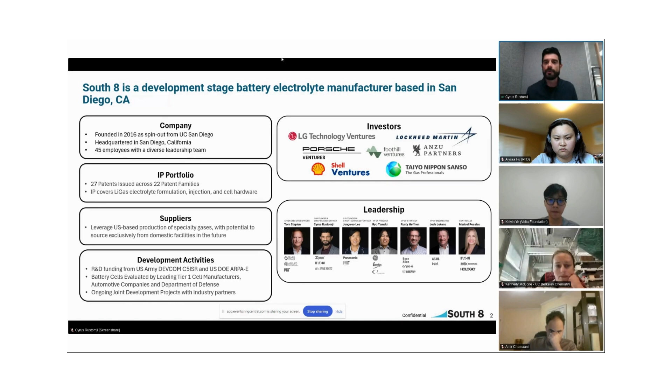Thank you. We are leveraging a wide base of suppliers, specialty gas manufacturers, with potential to source exclusively from domestic facilities in the future. So pretty much our entire supply chain is based here in the US and in North America, which is going to be extremely important as we move forward with lowering our reliance on our Asian friends across the pond there.

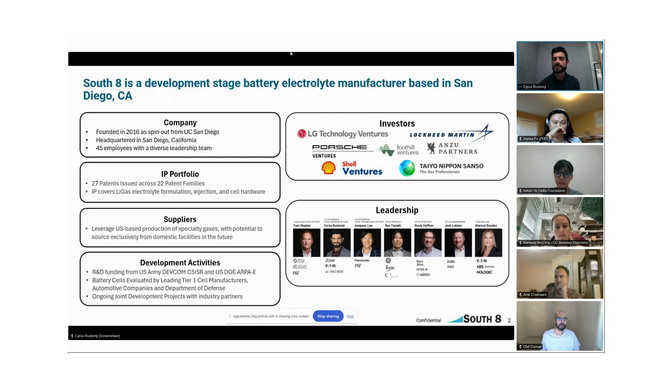And for development, we are actively working on a lot of contracts with the DoD, automotive manufacturers, power tools, et cetera. And what's public in terms of our investors, we have LG Technology Ventures on the cap table, Lockheed Martin, Porsche Ventures, as well as several other great names that are all shown here. And I really appreciate all their kind support over the years.

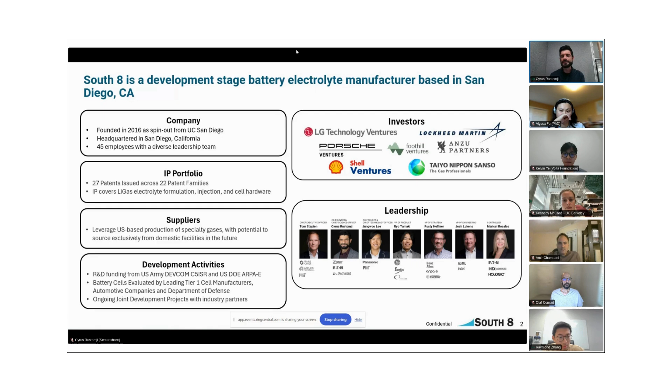So let's get into it. At a high level, the U.S. is behind in cell and electrolyte manufacturing today. The U.S. only has, I think, 60 gigawatt hours, where China is really kicking our butt there, producing closer to a terawatt hour, I believe, these days, in terms of cell manufacturing capability.

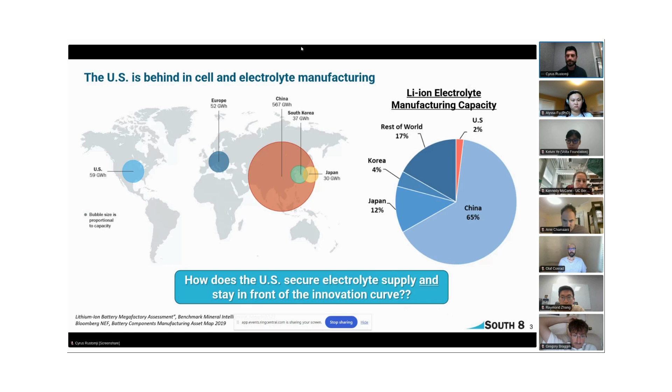The Biden infrastructure law has provided a lot of resources to scaling up manufacturing, but a lot of this is me-too products, basically the electrolyte that's already being produced today in Asia, specifically China. Same thing with cathode, anode, separators. So we really want to innovate on that and stay ahead of this innovation curve.

One area that we can really look at is the established gas industry, to leverage their already existing manufacturing operations to enable our rapid innovation and scale. If you look at the gas market, it's about $130 billion today, compared to the lithium-ion cell market, roughly 50, or I've seen reports up to $100 billion today on the cell level. The electrolyte is a very small component of that.

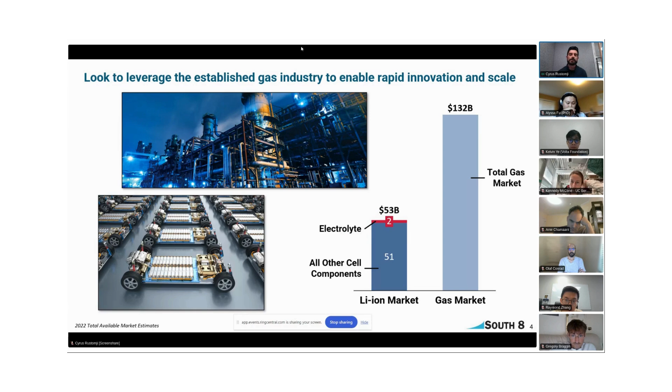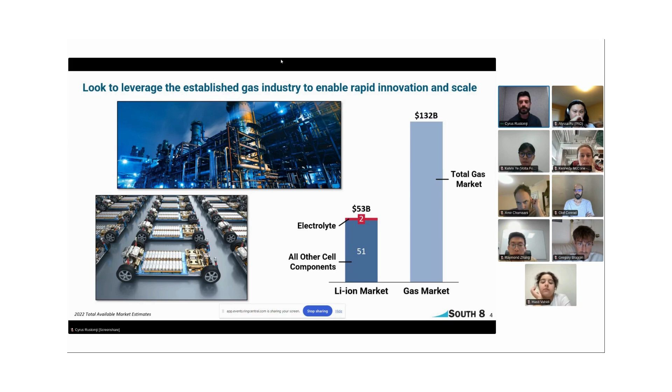And if there's a method where we could leverage this very large market into the electrolyte industry, that already gives us economies of scale to bring the cost very low. And I'll explain to you today how we can maintain and improve upon performance within your lithium-ion cells for these growing markets.

So what is South 8 really focused on? We are working on a novel liquefied gas electrolyte that is more or less a drop-in replacement for your current cells today. Of course, today we are all using liquid-based electrolytes in everything from our cell phones to our EVs and energy storage systems. It's basically a fluid that we sprinkle a little salt in, and it becomes an ionically conducting medium.

Now, I say fluid specifically because a liquid and a vapor are both actually fluids. We all know that vapors can also be liquefied under a moderate amount of pressure into a liquid phase. And so what we've been doing here at South 8 is taking these products that are gaseous at room temperature and standard pressure, liquefying them under a little bit of pressure, and then putting them into a cell.

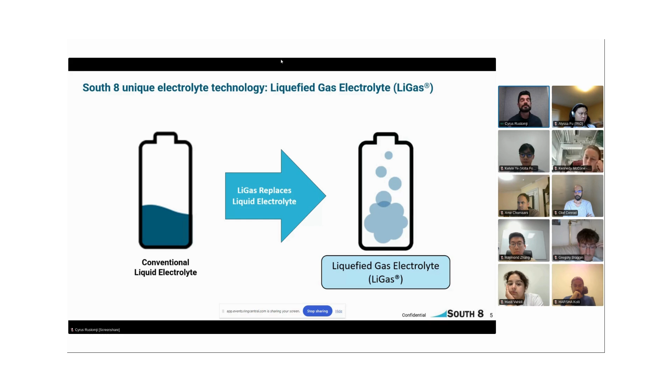Think of propane for your barbecue grill. Propane is a gas at room temperature and standard pressure, but you can liquefy it under a moderate amount of pressure and store it inside a tank underneath the grill. That's essentially what we're doing here. We have found a unique class of gases that work very well inside your lithium-ion battery.

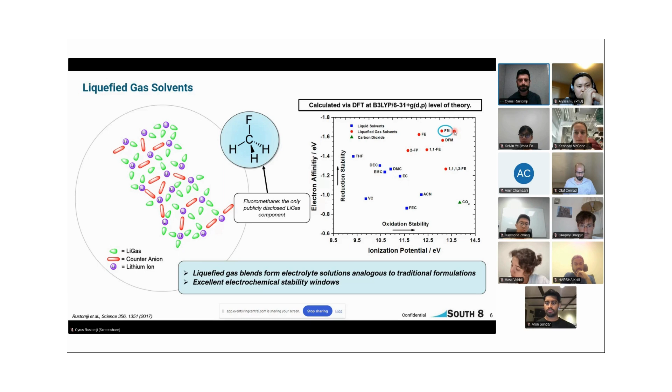So having established that these gases are electrochemically stable, what are some other qualifications that we look at for selecting our gases? Well, we want things that are cost effective. So we really just look at commodity gases. So think standard gases that you could buy off the shelf today. Pick up the phone, call up Air Liquide or Praxair or whoever, and have a cylinder delivered to your door the next day. That's essentially the components that we're looking at.

We always want to look at low viscosity and low melting points. That ensures good low temperature performance. We work with exclusively non-ozone depleting, non-toxic, and non-corrosive components. So anything acidic or that can be corrosive or toxic, we do not use. We do use some low global warming potential components, but these are significantly lower than your standard refrigerants. And so we are aiming to be very compliant with all the new regulations that are coming out.

Of course, I already discussed electrochemical stability. We want these solvents to be very stable in your battery cell device to ensure long cycle life. And I already mentioned these are commercially available in high purity, and of course compatible with all your common battery materials. So we use all your standard anodes, cathodes, separators, binders, current collectors; our gases are fully compatible with all these items. So it's essentially a drop-in replacement for that jelly roll.

Here on the right is a standard vapor pressure curve for a typical electrolyte that we use today. At room temperature, we're operating right around 300 psi. And around 100 degrees Celsius, we are looking to vent the cell. That allows us to operate with a good buffer between 60 degrees Celsius, which is the max operating or storage temperature, and thermal runaway, closer to 110, 120 degrees Celsius, which is generally where you see things really take off. So by venting the cell at 100, we can cut off that thermal runaway reaction, but still maintain very high performance in the cell applications and with our customer requirements.

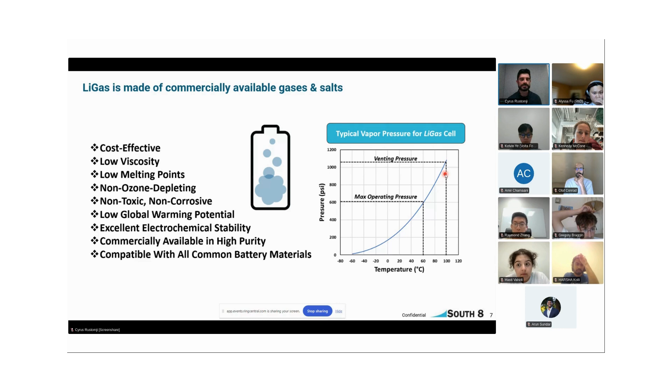So this slide is showing pretty much all the different value propositions that we have here at South 8 with our liquefied gas electrolytes. I'll touch on all of these through the following slides, but we do offer improved safety through a reduced fire risk, minimizing the potential for thermal propagation in your battery packs. Wide temperature range, industry-leading performance, everything from -60 to +60 degrees. I've already mentioned material compatibility is no problem for us.

We do offer increased energy. We are compatible with silicon anodes, but we can also go to thicker electrodes and higher voltage cells as well to increase your cell energy. We also perform very well under fast charge requirements. And lastly, it's a very cost-effective solution. Again, we're using commodity components, so we don't have to worry about manufacturing or synthesizing any new materials. So these are all very low-cost materials that we're using today.

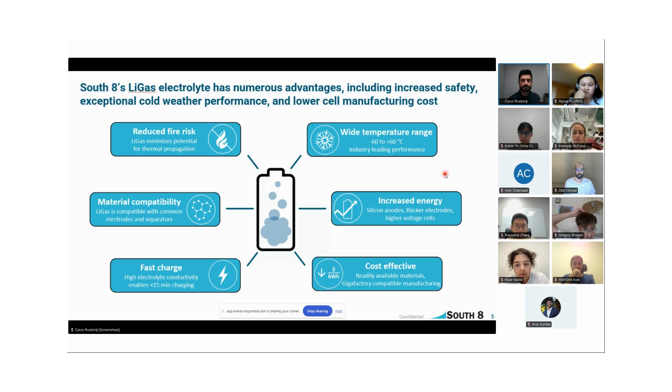So the gas electrolyte is a platform solution, and we are fully compatible with all your conventional cathodes, anodes, and separator materials. I mentioned that a few times already. One thing I will note is the form factors which we're operating in today. We're essentially just focused on cylindricals.

18650s and 2170s we are already producing and sending out to customers today. The 46XX packages is something that we're developing, and we hope to be shipping out in the very near future. Call it early next year. Those will start going out the door as well with some of our partners.

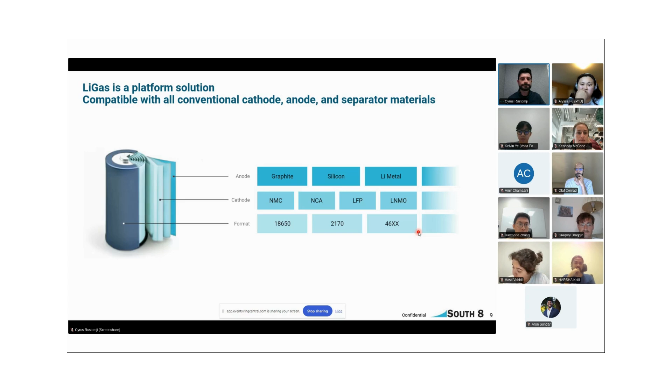Okay, let's get into some data. This is where all the excitement really happens, I'm sure, for a lot of you on the call today. So we want to share some data on this 2.7 amp hour 18650 graphite anode NMC811. So your run-of-the-mill type lithium ion cell today.

Over here on the left, we're showing a power map at room temperature. We charge these cells at a C/3 charge rate and then discharge at various rates from C/10 to 3C. And you can see our liquefied gas electrolyte can handle these increased rates without any problem, still achieving close to 100% discharge capacity at those higher rates. You can always expect a little bit of voltage drop there with the electrical impedance and things like this.

On the temperature map, we are charging these cells at C/3 at room temperature, but then discharging across all these temperatures. So everything from 40 degrees Celsius down to minus 60 degrees Celsius, we're operating very well in. Now, as we all know, lithium ion cells with your liquid electrolyte begin to lose performance right around 0 degrees Celsius. By minus 20, you're really losing everything if it's not already frozen. But anything below minus 20, you pretty much lose all your power and capacity in that cell, unless you have some specialty electrolytes, which some people have developed.

Here at South 8, low temperature is never a problem for us. We go down to minus 60, still delivering about 70% of your capacity on this specific cell design. We've also developed some silicon chemistries, which deliver even further improved performance down to minus 60. Now, while most people only need minus 20 or minus 40 degrees Celsius, we offer improved performance at those temperatures. But for those really extreme applications down to minus 60, we're really the only game in town. For those, we're really talking aerospace, NASA type applications, and defense, and some other opportunities out there as well, which we're looking into.

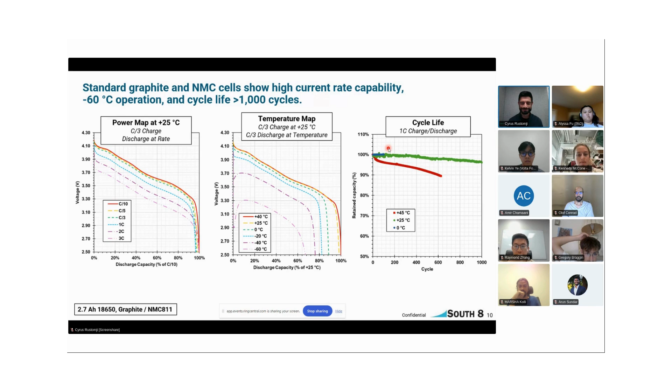This is the same cell package, but now it's third-party data that we are sharing with you today. So we have 2 jelly rolls, both 18650s, one filled with a liquid electrolyte, one filled with your gas electrolyte. And the liquid electrolyte is just your run-of-the-mill type carbonate-based electrolyte, nothing special there. This is just showing fast charge cycle life, where this is a DOE protocol, I should add. Every 3 cycles, it's a C/3 charge and discharge. Every 4th cycle, it's actually a 3.2C, which is equivalent to an 80% state of charge swing in 15 minutes.

And you can actually see that the gas cell is outperforming the liquid cell. We believe this is primarily due to the improved conductivity and the lower SEI impedance we have on the anode. So that allows less lithium plating on that anode and faster diffusion into the anode during these fast charge protocols. So we all know during fast charge, it's really the lithium plating that will kill you and kill your cycle life. So we actually mitigate that with the lower impedance SEI layer on that cell.

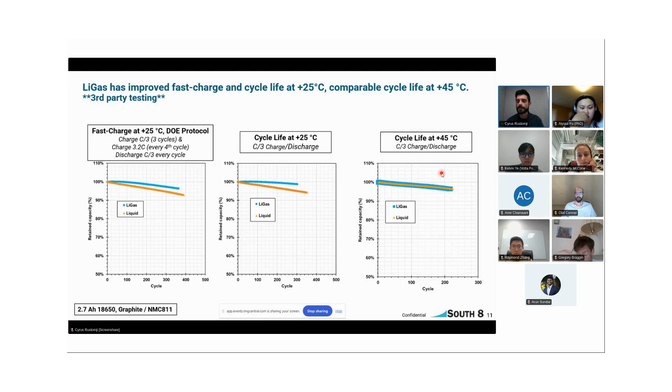Here's just your typical cycle life at C/3 charge and discharge, outperforming that liquid electrolyte. If you buy a commercially off-the-shelf cell from Samsung or Panasonic, this liquid electrolyte curve would be better, but this is actually just an R&D cell we procured from some partners at a low volume. So that's probably the reason why your cycle life on the liquid cell is not as great. And then at 45 degrees Celsius, we do have pretty much on par performance with that liquid electrolyte cell. So pretty good performance there at higher temperatures.

Moving on to silicon. This is some work we've been doing with a partner. These are 3.2 amp hour cells, 18650 cell form factors with silicon into the graphite matrix and an NMC cathode. So power mapping this up to 1C is no problem for us. We can do power all day long. That's not an issue. Temperature map, everything from 45 degrees to minus 60. Again, looks great with these silicon anodes.

And we haven't started fast charge testing with this yet, but we do believe the fast charge will be improved with the silicon cells as well. And then on the far right, we have cycle life, both stacked right on top of each other, the liquid and the LiGas cells there. So very good cycle life with those silicon cells as well.

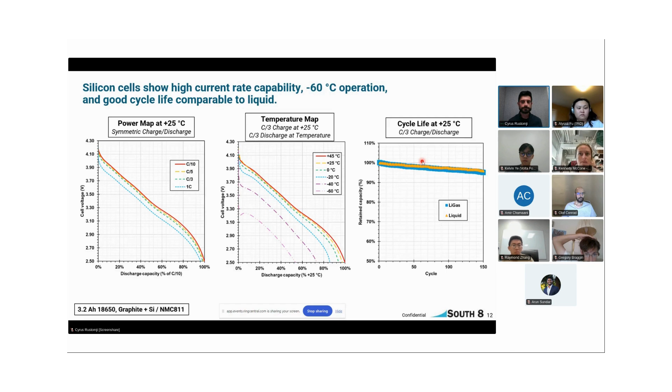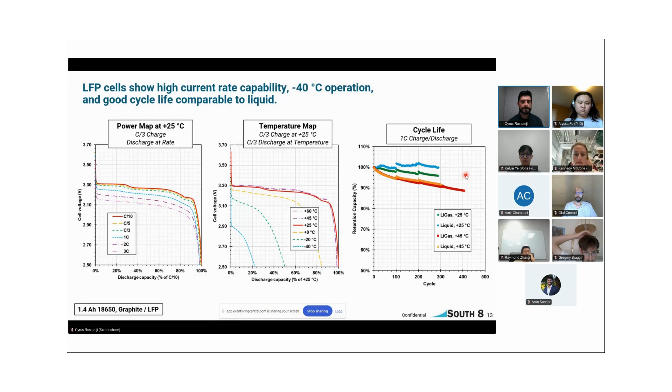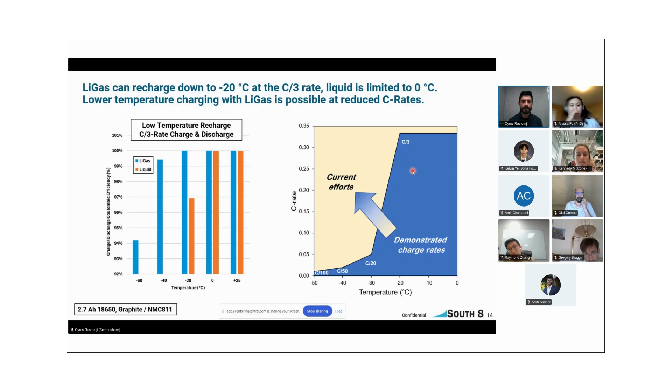So a few other areas that we are looking to increase energy: silicon, of course, but also going to thick electrodes is really interesting to us at South 8. We believe we can offer a 7% increase in energy and a 7% reduction in dollars per kilowatt hour with thicker electrodes. So why can South 8 enable these thicker electrodes?

Well, if you imagine your liquid electrolyte, it's more of a higher viscous solution. When you add it to these thicker electrodes, it doesn't wet that entire electrode very well. It leaves a lot of gas pockets. You don't really get the power you need out of that cell, and your cycle life just goes kaput very quickly. With South 8's liquefied gas, the solution has a significantly lower viscosity, probably about an order of magnitude, which enables very good wettability into those electrodes.

On top of that, we're injecting these solutions under pressure into the cell, which allows us to penetrate those very thick electrodes into every small little nanopore within that electrode. And lastly, we still maintain a very good electrolyte conductivity, so we can maintain that high power performance that everyone knows and loves.

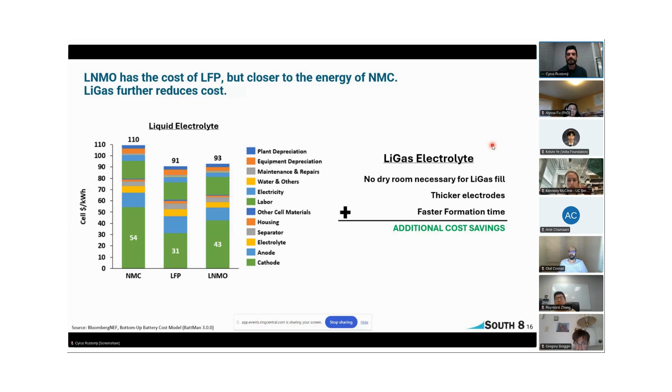You can understand this through the gassing process that occurs during formation. Those gases can actually block your electrode, and so you have to wait a very long time for those gases to diffuse out of your jelly roll to the surface to allow the electrolyte to re-wet that surface and continue to build that SEI layer. With the liquefied gas electrolyte under pressure, these gases are not really formed. If any of those molecules are formed, they just solubilize right into your electrolyte. And so you can accelerate your formation timing considerably, which is very nice.

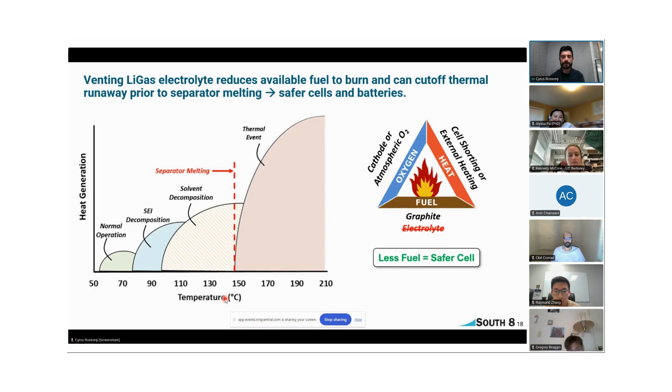And further, by removing that fuel, if there ever was a thermal event, then the heat output or heat generation would be substantially less than your standard lithium-ion cells. So essentially, less fuel equals a safer cell. And some of our testing to date really demonstrates that fact.

So here's a quick test. A 2.7 amp hour, 18650 graphite anode NMC cathode, nail penetration, where we compared two jelly rolls, one with liquid electrolyte, one with South 8's LiGas electrolyte. When we drive this nail through the can, we can see the peak temperature of the liquid electrolyte hit 700 to 800 degrees Celsius, whereas the South 8 cell was considerably cooler, right around 400 degrees Celsius.

And of course, this is a dead short, didn't give much time for the cell to evaporate all those solvents out of there, so you do see a thermal event, but the total temperature is less. And furthermore, we looked with a thermal camera at when the cooling time reached 100 degrees Celsius. The liquid electrolyte took considerably longer, on the order of 15 minutes, whereas the South 8 LiGas cell cooled down much faster, about half the time. So this really reduces the tendency for thermal propagation from one cell to the next.

And we do believe through updated electrolytes that we're working on and modifications of those cathodes, we could even further improve this safety, which is super critical to all of our customers in the industry today.

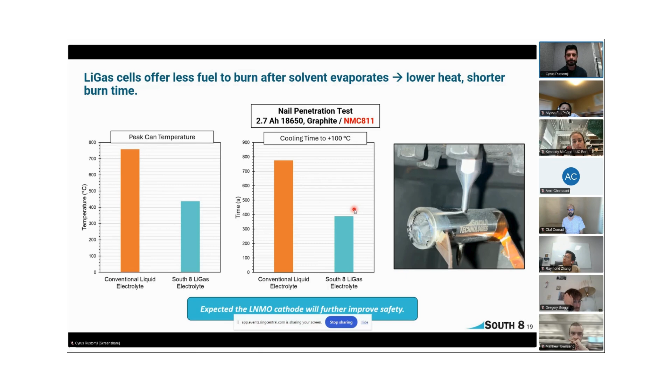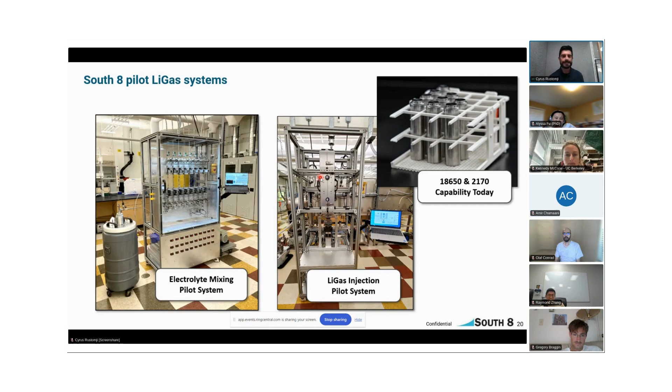We bring that keg to our LiGas injection system over here in the middle image. Currently, this is a single cell injection system, but it's a very rapid process with which we're able to inject our cells. And we are developing a multi-cell injection system to be in-house early next year, and then delivering to our cell manufacturing customers very soon thereafter.